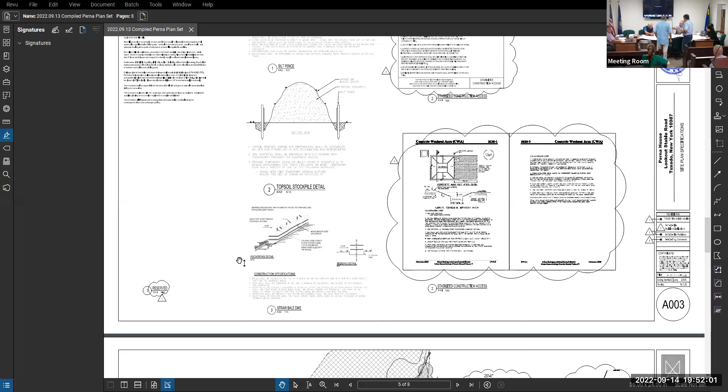It's vertical scale, so this is the elevation change and this is the distance change, and it's been unfolded to make it into a straight line. What it's showing is that the lead in from the road is 4%, and then there's a very long 10% slope up to the apron of the garage, more or less.

Spot on. The applicant has been before the board of trustees to get approval for the driveway.

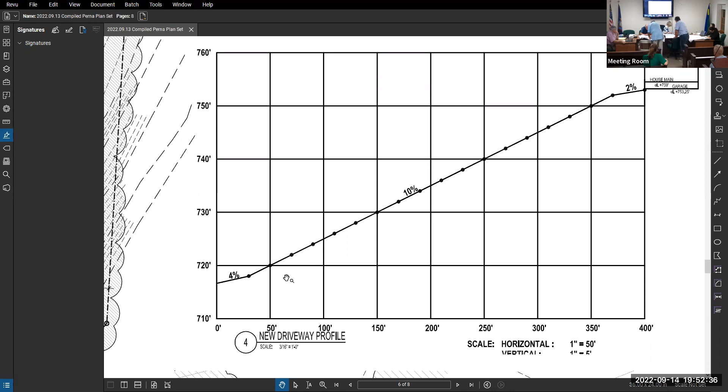There's also a cul-de-sac, an even better one. Yeah, this is just elongated like a driveway.

For every 20 feet, nobody wants to go up 2 feet, anything more than 10 equates to 6 degrees. Only one person speaking at a time, or people are going to get confused.

So who wants to go first? Just to point out what Jay was saying, this is sheet 4.

So those words are referring to, and there's also a unit diagram of what happens between 20 feet to, vertically at 2 feet, which equates to 10%, or 10% to 6 degrees.

So it's shown this way, that way. Also shows on this plan right here, measuring 6 inches is about 20 feet. All these, and this is the scale at 1:40. Is there any point that's over 10%?

Toward the end, which is further out here somewhere. So just to cover over what Joe was talking about.

What's the edge of this property compared to the driveway? The driveway is 10 feet away from that. And that's just the wall at the edge.

So it doesn't create a greater slope at the property line. It keeps the slope as is, so that the wall just cuts into it, so there's no drainage issue or change as far as water is concerned.

This driveway actually slopes toward the center of the curve, or inwardly to the site itself. So wherever you're at, it would drain toward the center and then collect down at the bottom here, where we created another collection area.

So this small area just collects about this much area, but most of it will go through because the whole driveway is gravel with item 4 on it. So there's no non-permeable surface. It just goes right through.

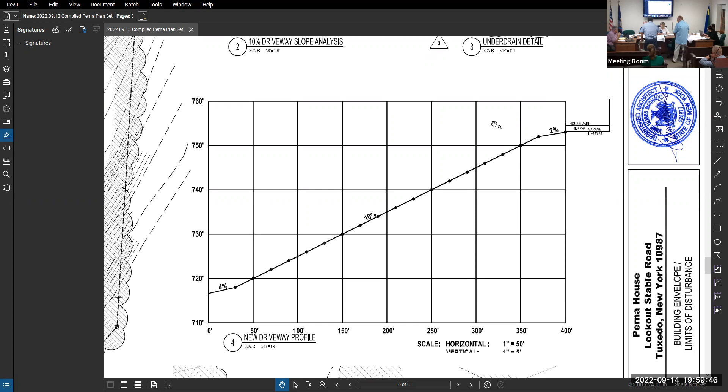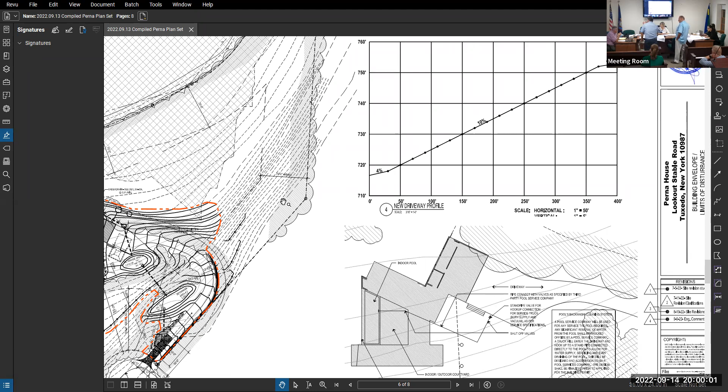Okay, but you're saying there's a 15-foot wall. No, the wall is designed to be up to 10, hopefully not that much, but anything over 4 in the front yard needs a variance, and anything over 6 in the side and rear needs a variance. So let's think about that in the next couple of days.

It sounds like it's very close. I heard 15, that's why I thought maybe you had to make it 15 to accommodate the 10% slope going up to the house.

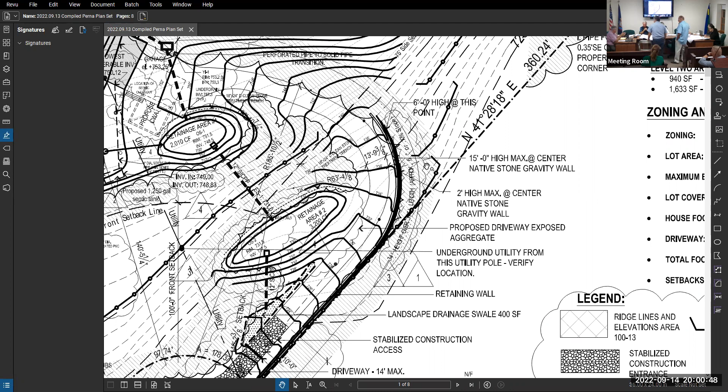Just to go with the heights, for this whole wall from the beginning it's actually going to be like 1 foot, then you're good up eventually to 4, and then it may be up to 4 somewhere here, and then one small part maybe up to 8. I will look at the plan tomorrow to determine what the front and side is, based on the orientation of the house and the front yard.

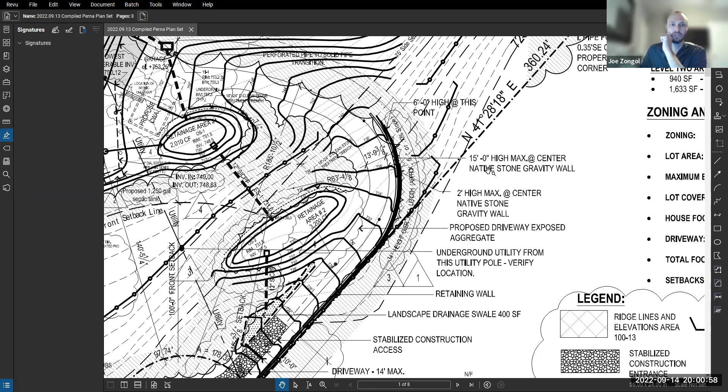If I can interject, the plans on the first sheet call out for a 15-foot high gravity wall. Which sheet? The first sheet, A001, sharing it on screen here - we have a 15-foot high wall here, and a 6-foot high wall over there. Oh yeah, I see the sign. Yep, okay, I forgot to change that - that was from an older design, an older iteration.

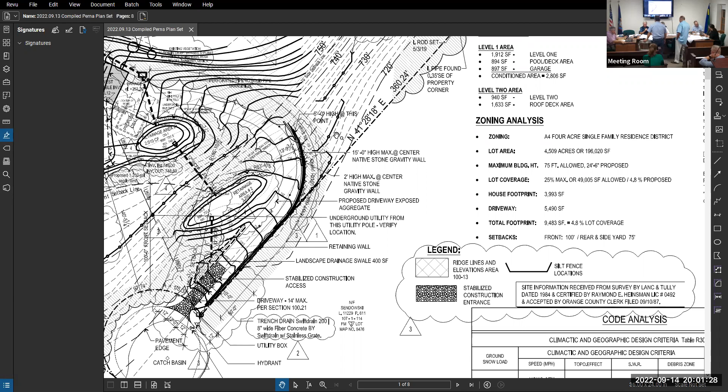All right, let's give that some thought, and I'll look at it tomorrow and figure out exactly what the front and rear is. The orientation of the house really is facing the road. Thank you, Joe, for pointing that out.

Joe mentioned, I'm just going to point at the sheets, this one and that one. This is the construction entrance. The concrete washout area he pointed out earlier is here, this is the concrete washout area. This is a construction entrance, used so it doesn't drag dirt onto the regular roads. The stockpile for topsoil is this here and that there.

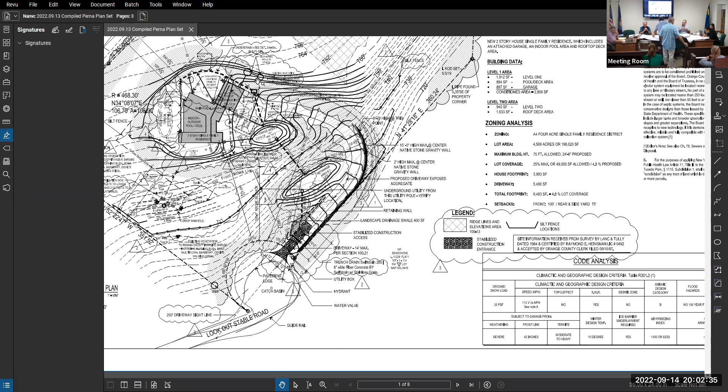And the geothermal well location now is right there, the 2 circles there. Is this guy right here. Okay, and the cut and fill analysis in this version? The cut and fill is on another sheet, which is sheet A002.

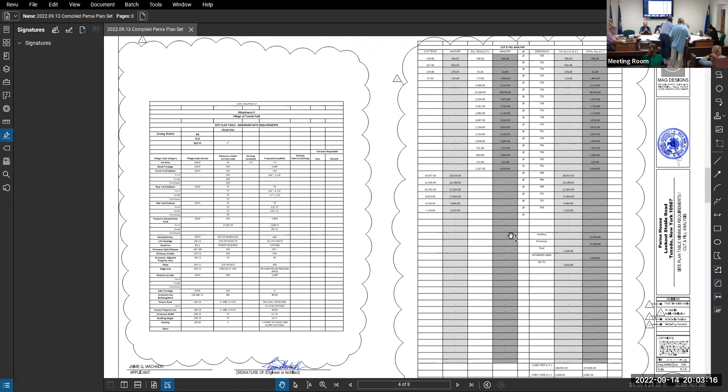And if I remember correctly, we got about 18 yards extra showing, or I got that backwards. Are you going to be bringing in fill or getting rid of fill? Hopefully we don't have either of those. Of course, hopefully we don't, but if anything we might have to bring. Oh no, it's actually excessive.

Offsite material is required if this is negative. So, the total cut, which is how much material they need to get rid of, is 4,000 cubic yards - that's the second from the right column. The total fill, which is the material they would need to bring in if needed, is 3,982. So it's a difference of 18 cubic yards - that's nothing, 2 or 3 dump trucks depending on how big your truck is.

But more importantly, they're showing that they're going to have excess material, which is annoying for them until they find someone close by who wants it. But it means that they don't need approvals from anybody to bring in fill.

No chemical analysis needed in the fill. And then, as far as site draining, there are irregularities underground. We see a slope going one way, but underground there might be a little mound of rock which captures a certain amount of water and keeps it in one spot rather than letting it go down the hill. There's also pockets of air that, once you take rock out, we might need dirt for, hopefully.

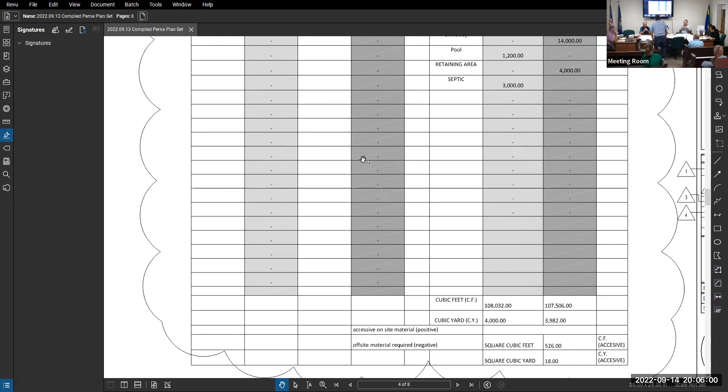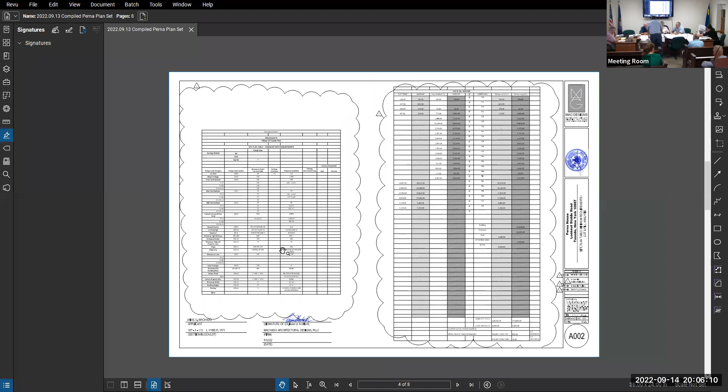That's one advantage. Can we shift over to the maximum building area? I think we have it on sheet 5. Can you see, Jim? Yep.

The double dash, long dash line, indicated in red, is the area that will be affected. My understanding of the building area is anything, including the septic field, whatever gets altered, is where construction is going to be happening — not necessarily meaning the trees in those areas will be taken down. Is this the water line? Yes.

Two meetings ago, I believe, we requested — originally we had the water go to the cul-de-sac, but it made more sense to go downhill, and it's a shorter distance. And John, the distance of the septic field needs to be away from the property boundary. George Zungul and I discussed that last week — 10 feet is the requirement.

Have we measured this off in terms of the outer edge of the field? I scaled it up with the plan. It looks to be over 10 feet, and I'll ask them to mark that on their next set — 10 feet or greater.

We also indicated a schematic, can't seem to remember what sheet that is — maybe 5? Just before we jump away from this one, does anybody have any questions about the building envelope as shown here?

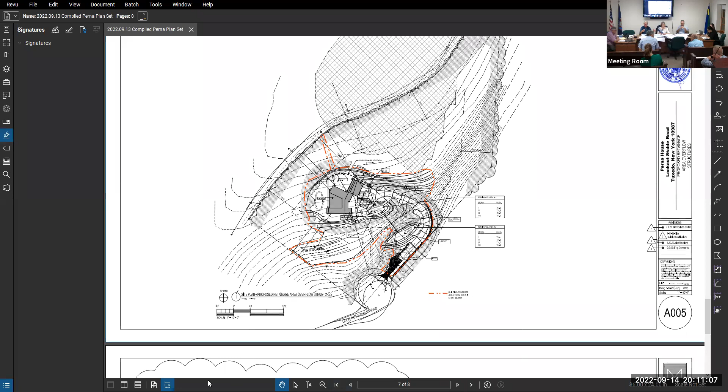Yeah, we did that, but maybe we did that too early and the weather affected it. We actually did exactly what you said. We took paint and put it on the ground, but apparently that paint is gone. We marked the trees, marked some of the trees. Actually, I'm not sure if it's easy to see.

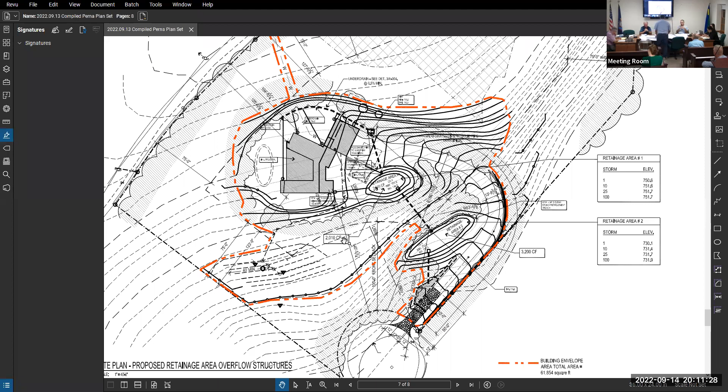So this one, right in the septic field. Again, it's hard to see, but I did indicate dimensions of the boulders that existed that I knew were not going to move. Let's see, where is it? There are a couple of trees that are in the size of the caliper indicated on here as well.

One of them just turned off. They're small, I mean I could blow this up. Actually, it's right here, there's one, the caliper here. There's a tree right there that's being moved. That's one, or taken out. Another one is here, and there's a third one which I can't see at the moment, but it's in there somewhere.

And I marked off, what I did was we took a straight line from here to there, and whatever was in that path we used to spring off using coordinates and a compass. And then we measured and indicated a rock, and from that rock we indicated where the septic field is.

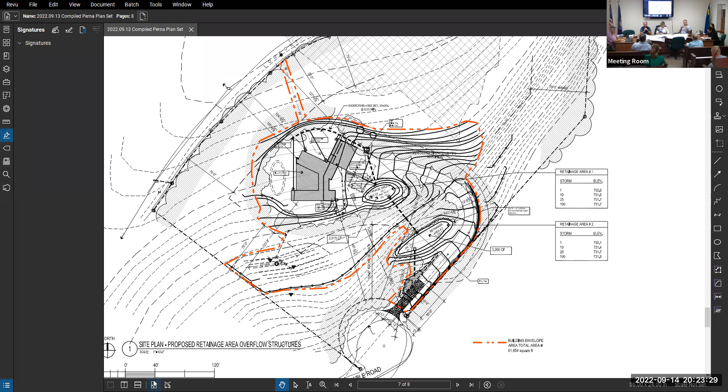Would you like to speak to that? Yeah, I would love to speak to that. It's a 2-story house. Two-thirds of it is only 1 story. Well, about half of it is 1 story and half is 2 stories. And each floor, the ceilings are 10 feet, so between floors is probably about 1 foot of flooring. And so the total, even with the parapet around the roof, let's say the legal size of the parapet is 4 feet.

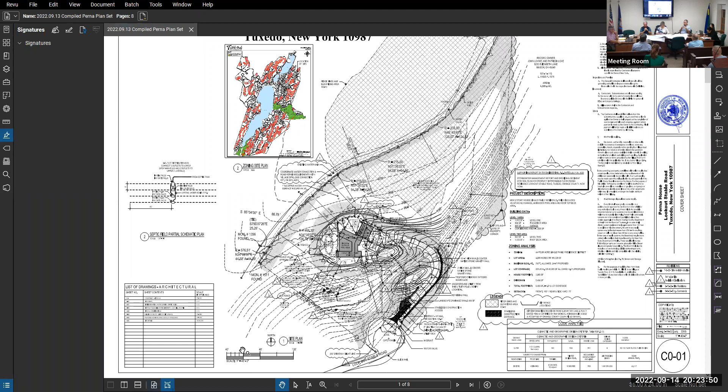The house is not going to be more than 26 feet high from the ground. So I don't know how it gets to be five stories high. It's not going to be 50 feet high. It's going to be probably around 26 feet at the highest point. So I don't know what plans you looked at, but it says specifically 2-story single-family residence. To get to 50 feet, I'd have to have 25-foot ceilings. I can barely afford to put 10.

Well, based on the calculations and the plans that we've looked at, it was calculated that the structure would be taller than 26. Who did the calculations? I would request that all the submittals... No, you just said you did calculations. Who did them?

I'm sorry? You said based on calculations. Who performed the calculations? Provided in the site plans that we've looked at. The site plan does not indicate anything about a 5-story building. It says 2-story building.

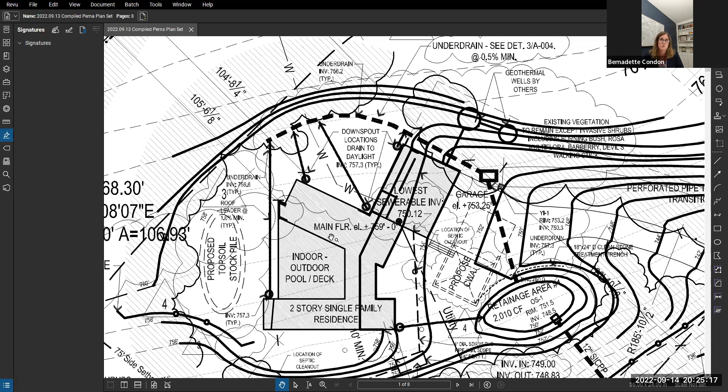What I would request is that all of the revised submittals, as well as any revised plans that have been given to the town engineer and the board, be given to the neighbors so that they have an opportunity to review them and comment and determine whether their concerns have been addressed, or any other concerns, before the plan. Okay, I want to interject here.

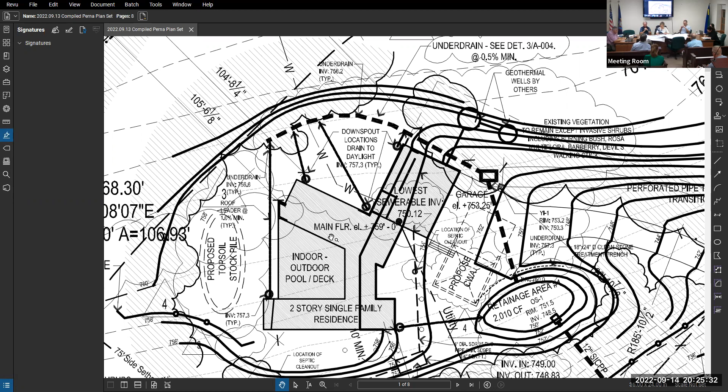According to regulations... building now, are you sure you want to go here? I mean, you have a 2-story house. Okay, the neighbors have all the rights to come down to the village office and inspect the plans, which are all here, much easier to read than the little ones that may be on the website. They have the contour lines.

We discussed the height at which the floor, the basement or the ground floor of the house, is positioned. And our understanding is this is a 2-story house. Is there any other issues on the planning board side that you'd like to bring to our attention?

The only other thing in addition to the stakes would be trees that are proposed to be taken down, and that we have an opportunity to observe that as well. Right, that's determined at the BAR.

I don't know if you want to go ahead at this point while you're doing the staking to mark the trees. Sure, I think that might be productive. And just as a point of order...

I'm not sure that you guys can just wander onto the property without permission. I mean, whatever you can see from the road is great, but unless you're going to make arrangements with Mr. Perna, it's not just fair game to wander anywhere in the village.

Well, understood, but the building inspector and the engineer, I presume, will have an opportunity to review the stakes and the markings. Well, yes, and the planning board and the BAR, but I just want to make sure. I'm not the lawyer. No, understood. The planning board can't allow anyone to trespass on someone else's property, of course. So if you're on your own property or from the road or public right of way, that's one thing, but actually going on the property is another.

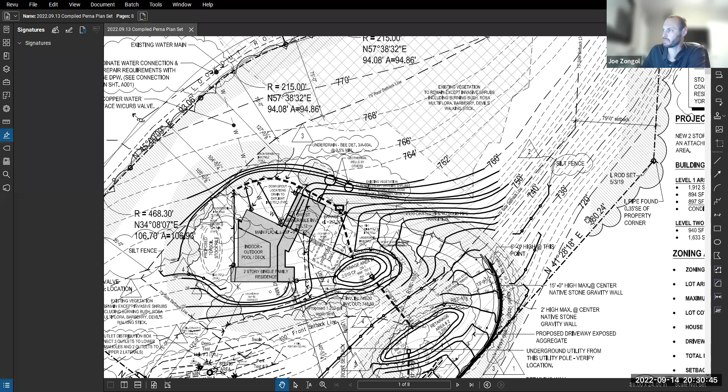Gentlemen, I don't know if you could add, in terms of the contour lines - there are labels, if you could still see my screen, there are contour lines. Right, yeah. And in my experience, and Ashley can speak to this, the planning board reviews the contours of the site before us, not the surrounding properties.

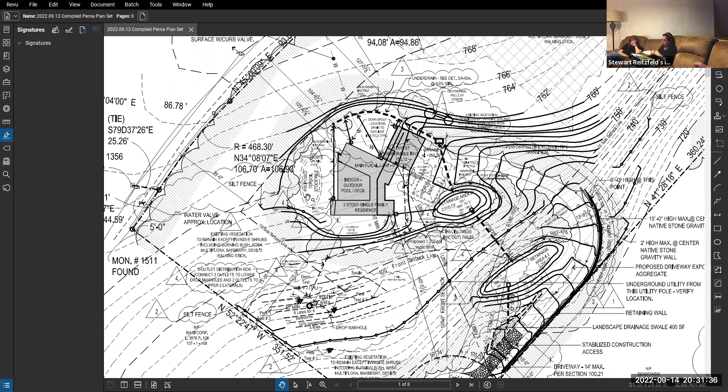Okay, however, and I appreciate that, Joanne, thank you very much. However, this is impacting neighbors' properties. So to really be able to evaluate it fairly for all parties concerned, we insist that values be given to the contour lines and extend them to include the neighboring properties. I mean, you're not just building a home within your own community. This home is going to affect the entire neighborhood. And I would like to make that request on behalf of us all.

They do extend somewhat. They extend, but I will repeat, that is not standard. I'm going to go back to the comment I made previously about observing the site. This goes the other way.

Mr. Perna has no right to send a surveyor onto your property to determine the contours of your land. They've provided benchmarks, deed points and contour lines. Now it's up to you to establish the elevation of your house. No, we have that, but...

So listen, if you want permission to go on... You have our permission. Okay, you have our permission. But are you going to pay for the survey? I'm not even going to go there. Not at all. You will - that is not appropriate. But that's... uh, not right.

This application relates to this property, and Mr. Perna has provided the necessary information vis-a-vis the code. Yeah, no, I'm sorry, I wasn't offering these services, I mean I was...

He is going to be marking the location of the house in the field. You have the contours available to look at in the village office. The site plan will show the height of the property and the proposed house. And I think that's the material within which it's appropriate for the planning board to consider this application.

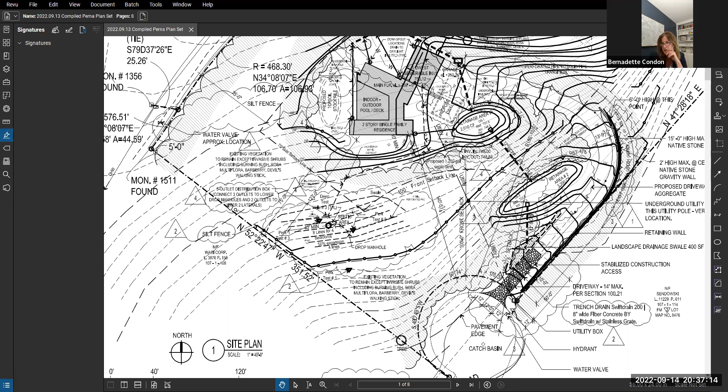And can we make sure we also get a copy of the summary or letter, whatever it was, that was provided to the engineer yesterday, or on September 10th? There's no final comments by the engineer yet. When we get final comments, we'll distribute them. No, understood, I understand that you received this, it was the applicant's engineer comment letter.

Oh, okay, was that dated the 10th? I think it was dated the 10th, to correspond. Okay, all right.

I have one more question: when is the next planning board meeting? It's in two weeks. Okay, thank you, everybody. I think with that, we'll close the review of the Perna application.